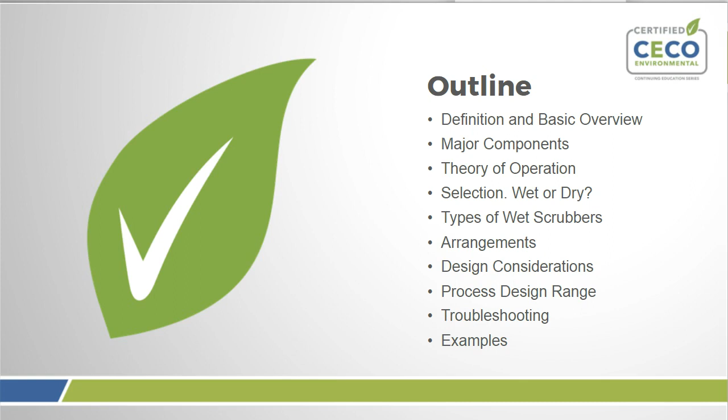But before we get started, we're going to start with a poll question, and you will be able to answer the question on the next slide. So, how much experience do you have with scrubbers? I'm an expert, I have some experience, I have a little experience, what is a scrubber? Here's where you can answer the question. We'll give you a couple seconds.

All right, so we have a good portion in here that have some experience and have a little experience. We got a wide range. I think this will definitely help. The presentation will help most people here. Might be a little bit basic for some of the experts, but I think there's still a lot in there that you're going to be able to pick up on this.

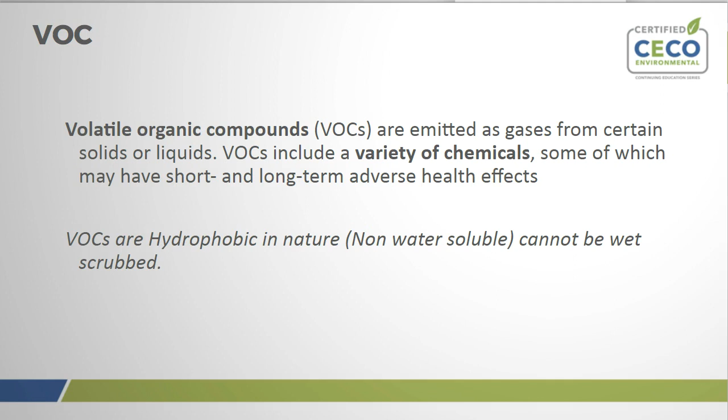Particulate matter. Finally, our last and one of the most frequent culprits in our airstream is particulate matter. We can see the definition above, and in most cases we group this into two categories, 2.5 and 10 microns. While wet scrubbing can handle these emissions, it is not the most efficient in handling these contaminants. If your airstream has particulate matter and acid gases, this might require a system train of air pollution control equipment

That entails separation of particulate matter before wet scrubbing acid gases. If you would like to learn more about particulate matter and how that can be collected via Venturi Cyclone or Dust Collector, please sign on to CECO Certified to look into the cyclone fundamentals.

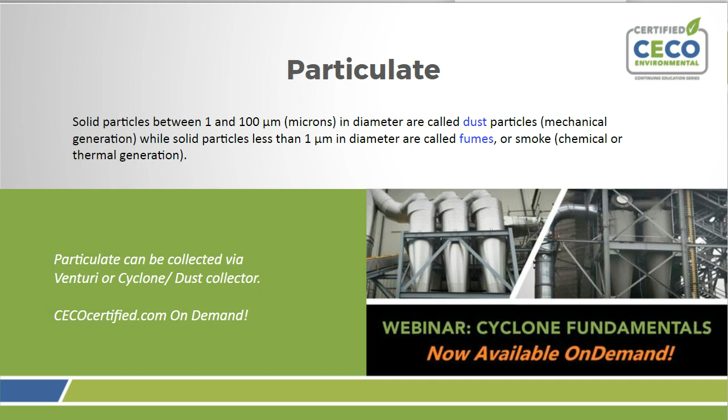Wet scrubber definition. Now that we have an idea of our airstream and our main players, we need to start with some basics, like a definition of a scrubber. A packed bed scrubber, also referred to as a wet packed bed scrubber, is an air pollution control device used to remove and destroy contaminants in an air gas stream.

To simplify, imagine a large vessel or container, like a big propane tank turned on its side, that is empty except for something that resembles baseball wiffle balls inside, held in the center, with a shower head at the top running inside with water, collecting at the bottom like a bathtub, that is cleaning dirty air, which collects dirty water at the bottom of our vessel, just like when we shower.

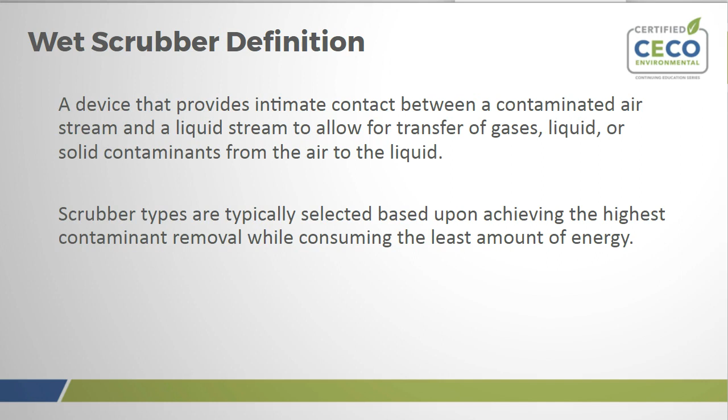Scrubber definitions. We will discuss a little later how a scrubber removes air pollutants, but for now, it's important to know that scrubbers are capable of removing inorganic fumes, vapors, gases, and mists. A scrubber can be used for particulate matter control, but higher PM concentrations can clog the scrubber internals. So a scrubber is limited to airstreams with low dust loadings.

If you have an application for high particulate matter, CECO has another equipment solution for that application. See CECO webinar. Bottom line, scrubbers are not vacuum cleaners.

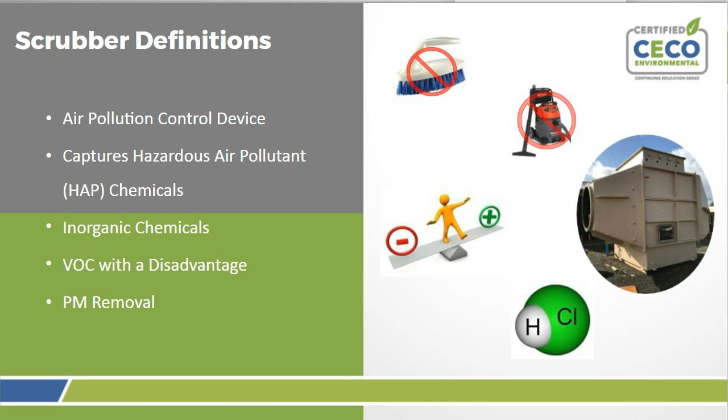Reasons to use a wet scrubber. All the reasons above are true for the use of a wet scrubber, but the main driver is human capital, physical capital, and environmental standards. Number one, the area in which workers are present does not have adequate air quality standards.

Number two, the process is so corrosive or dangerous, the air fumes must be evacuated and removed for the health and safety of the equipment and facility. And lastly, the end user is under state, local, or federal ordinances to require APC equipment or an air permit.

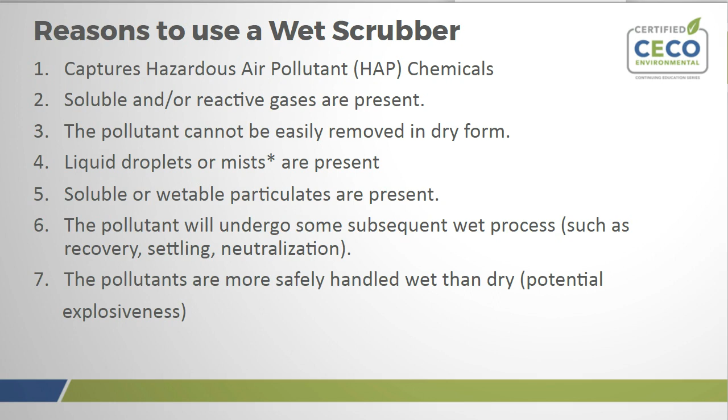Wet scrubbing process. Wet scrubbing is a two-step process. In the first part of this process, we are simply trying to capture the contaminated air. I think a great way to connect this is think about allergies. Anybody suffer from pesky pollen? Nothing helps more than a nice rain, and the proof is in the water.

If you've ever watched runoff water after a rain event, you may see a yellowish hue in the water. That is pollen. All the pollen in the air, we will call dirty air, is then cleaned after a rain event. The contaminant or pollen passes through with the help from mass transfer from air into water.

In the second step, we're trying to then break apart these molecules back into clean air and exit the scrubber with no contaminant or scrubbing liquid. Another good example of how this process is achieved is with the mist eliminator.

Think about an early morning walk near a garden or forest and seeing a spider web covered in small droplets. These small water droplets are grabbed as it passes through. This is similar in the way that a mist eliminator is able to grab the moisture from the air as it leaves the scrubber.

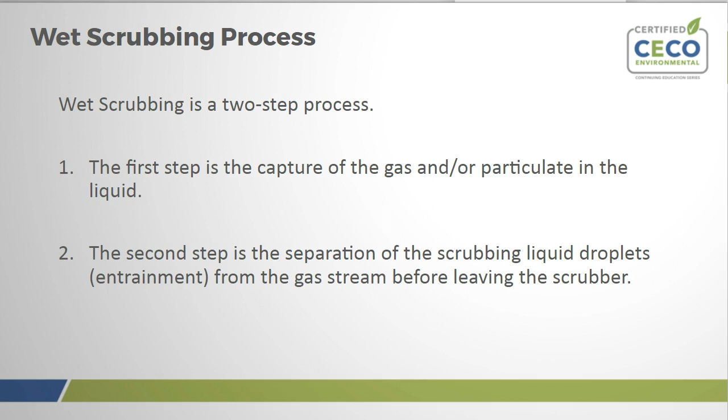Scrubber types. Before we move deeper into the scrubber process, let's take a step back. You may have heard the word scrubber used for other air pollution control equipment such as bioscrubber, Venturi scrubber, spray tower scrubber, or tray tower scrubber. The best way to distinguish between these different types of scrubbers is best to understand each has a niche application usually associated historically with a specific industry or location.

This could be determined in the case of operational costs versus capital costs, or possibly some end users' limits on the amount of fresh water available.

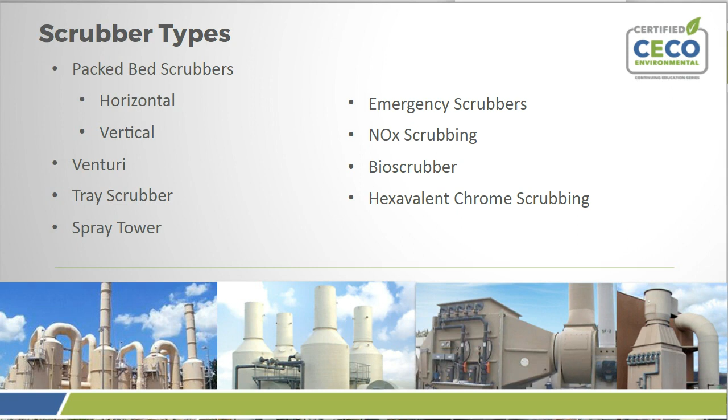Example industries. As for the industries listed above, you can see wet scrubbing has a fit in many processes. Most important when looking into a wet scrubber application, no matter the industry or size of the system desired, is the data. It is pivotal to provide the most current process or stack testing data available.

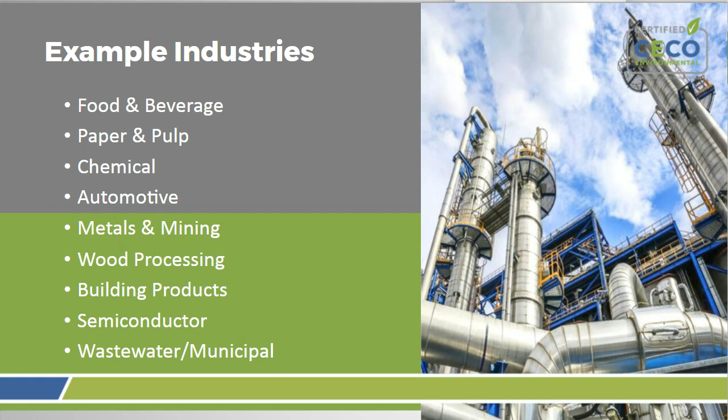Process examples. This data we are looking for is the following: the CFM or airstream volume, concentration of contaminants, and required destruction removal efficiency. This allows us to properly size and engineer a system solution that is the most efficient and fits your needs. The most important thing is understanding what the process is. This will help us determine what type of scrubber system and design will fit best for your application and location-specific parameters.

Such as one of the examples above, in wafer chip manufacturing for semiconductor, we usually see a horizontal packed bed scrubber in fiberglass material construction, most commonly rooftop installation, with some special requirements such as redundancy in pumps and fans, which we would not find in metal plating applications, for instance.

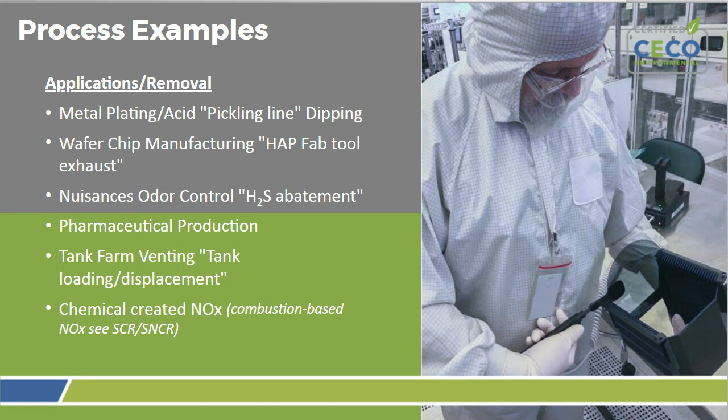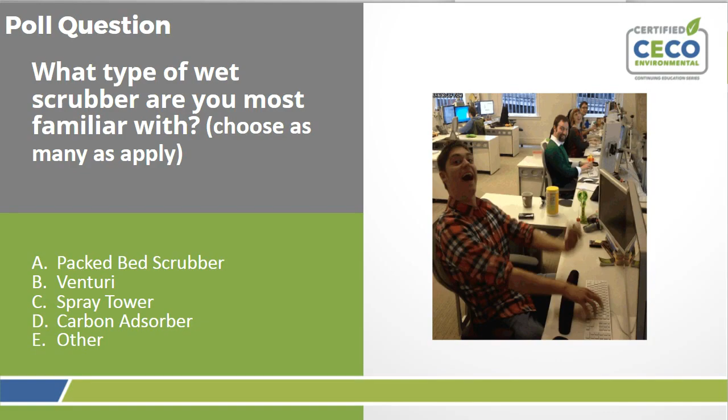All right, everybody, we are at our next poll question. Again, like the last one, you will be able to put your answer on the next slide. So what type of wet scrubber are you most familiar with? For this one, you can actually choose as many as apply. So we have packed bed scrubber, Venturi, spray tower, carbon adsorber, or other. Here's where you can add your information. I'll give you guys a little bit of time on this one since you might have more than one that you're familiar with.

Give you a couple more seconds. We'll take a look at the results and see what everyone out there is familiar with.

Not too surprising that the packed bed scrubber would be the one that people are most familiar with. It definitely is the one that is seen out there quite a bit, along with the Venturi, but it seems like people have experience across the full spectrum of different types of scrubbers that are out there.

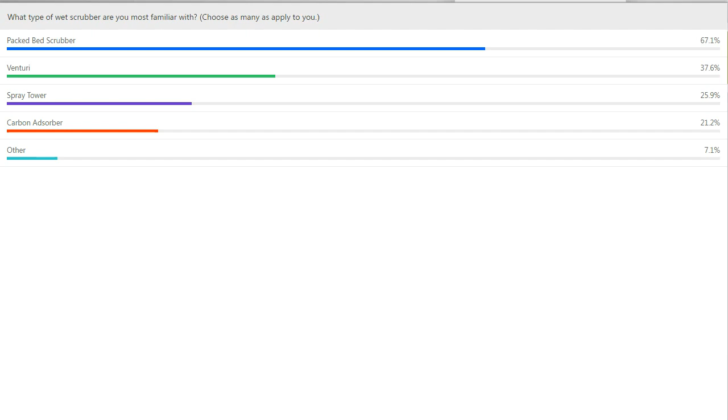All right, we are now going to start getting into the nitty-gritty of the scrubber discussion. Here on the right, you're looking at an exploded view drawing of a typical vertical tower. There are 5 major components that are normally used in a wet scrubber. They are the packing media, the mist eliminator, the recirculation pump, spray nozzle, and the instrumentation and controls.

We'll see in a moment the packing media is the heart of the scrubber. The mist eliminator removes the large droplets. The pump recirculates the scrubbing liquid. The spray nozzles irrigate the packing media with the scrubbing liquid. And the 5th major component, though not shown in the exploded drawing, consists of instrumentation and controls.

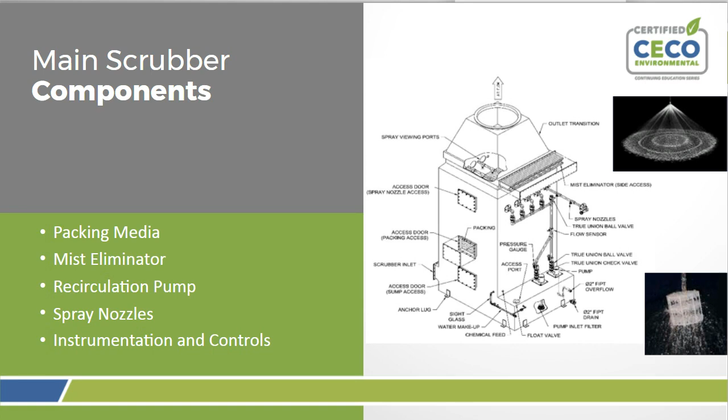There are over 20 different items that we can customize a solution for. The minimum basic ones are flow meter, pressure gauges, valves, pH probe, differential pressure gauges, water makeup, and liquid blowdown systems. So let's move on and see how all these components work together.

And the bottom of the scrubber contains the sump and the scrubbing liquid. A pump sprays this liquid over the packing media, usually through spray nozzles, so it's evenly distributed and flows down the packing media. This can also be done through weir troughs and a few other different methods.

The clean gas is now exhausted into the atmosphere, but before doing so, it passes through a mist eliminator section. The purpose of the mist eliminator is to capture any large droplets that are blown off the packing and also capture the smaller droplets from the spray nozzle that become airborne.

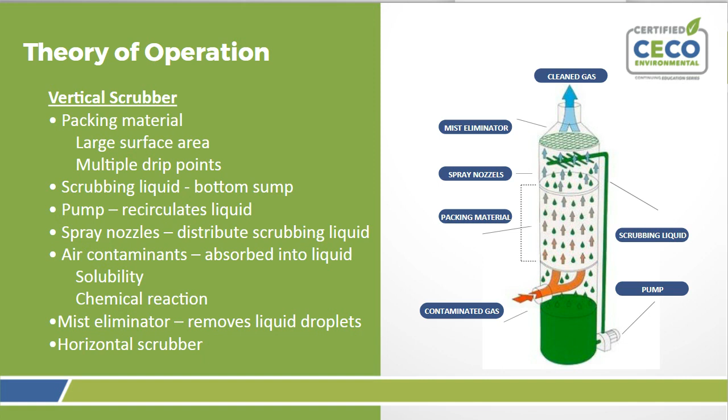Earlier, we talked about three methods of how air contaminants are absorbed and transferred into scrubbing liquid. An example of the first method is when a chemical air contaminant is absorbed into the scrubbing liquid using water only. When scrubbing a strong acid like hydrobromic acid, which is soluble in water, it will ionize, forming a hydronium ion and a bromide ion as shown.

Ionization means that the molecule acquires a negative and positive charge and undergoes a chemical change. Likewise, a strong acid such as hydrochloric acid will ionize in a scrubber using water only, forming a hydronium cation and a chloride anion, and once again undergoes the chemical change. There are many chemicals that are soluble in water that can be removed in an airstream using a once-through water only system.

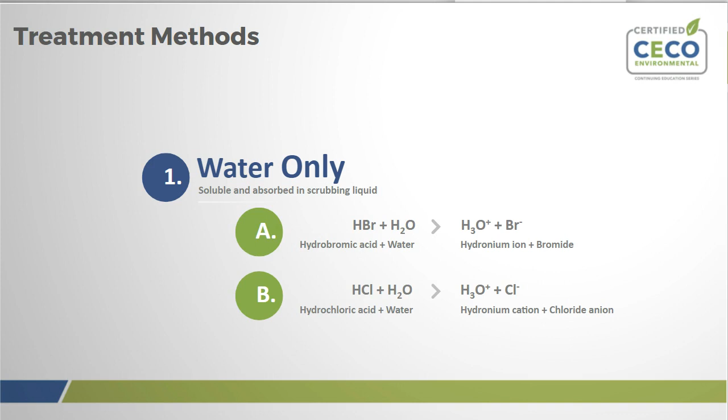The second treatment method that can be used to remove air contaminants requires the addition of a chemical additive. An example is sulfur dioxide, as shown, reacting with water and a solution of sodium hydroxide at a pH of 9 to produce sodium sulfite and water.

Reactions like this, shown in green, are typical acid-base reactions forming a salt and water, which has a neutral pH of 7. This reaction occurs in the packed bed section of the scrubber and is called a neutralization reaction.

An example of this is if you ate too much spicy food for dinner, you can relieve the stomach acid or heartburn by taking an antacid tablet. That'll neutralize the stomach acid. In other words, it's a neutralization to ease your heartburn.

The second chemical reaction and neutralization shown here is a common contaminant, hydrochloric acid, reacting with sodium hydroxide to produce table salt and water. As a side note, you'll notice we briefly talked about using HCl with water only, but here we're showing you can do it as a chemical reaction.

The reason is that in some cases, the addition of sodium hydroxide to the scrubbing liquid actually improves the removal efficiency, leading to a more efficient scrubbing operation. So you need pH control. The pH control is optional for hydrochloric acid, but we do use chemical addition pretty regularly to improve the removal efficiency.

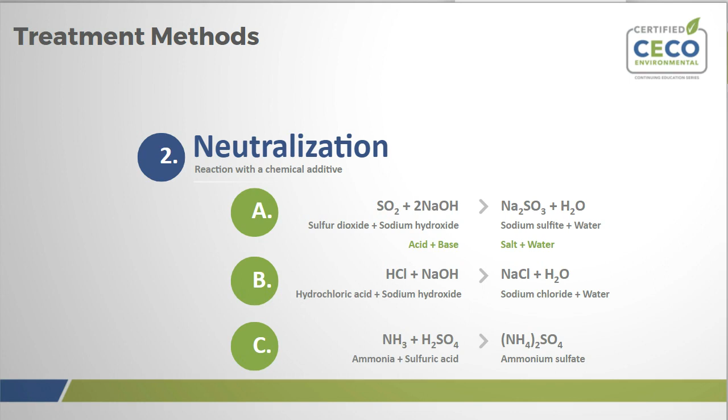I mentioned earlier that there are 3 treatment methods to remove air contaminants in a scrubber. This third method is applicable for a large group of chemicals. The standard chemical engineering gas absorption calculation does not apply to these chemicals because they are not in gas form, but are present as a mist droplet or a fume.

These chemicals are essentially non-volatile. Non-volatile is just a fancy way of saying that these chemicals do not readily evaporate in the gas like the previous chemicals we discussed.

Scrubbers remove these mist droplets or fumes by the mechanical process of impaction rather than absorption. Extensive experience shows that these well-designed scrubbers can remove 99% of mist fume droplets in the 5-micron range or larger.

Now, some of you may be asking, why are you making such a big deal of this third treatment method? Well, in my experience, this third method is probably the least understood and creates some confusion versus the other 2 methods. We'll cover a few major points to help you better understand this method.

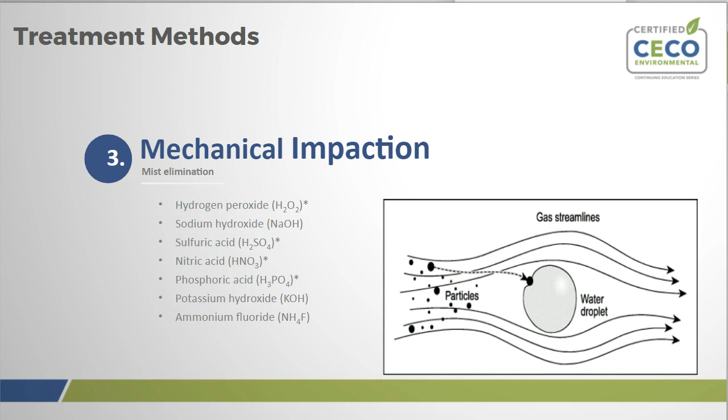There's usually an exception to every rule. First, you'll notice that 4 of these chemicals have an asterisk next to them, and it's possible for these chemicals to vaporize if they are heated enough and are used in a hot process at the source. Any of these chemicals listed are being emitted by a hot enough process to actually vaporize them, typically 200 degrees C or higher.

Then they will condense into micron or sub-micron sized fog droplets when mixed with a cooler airstream on the way to the scrubber. A scrubber cannot remove these fog droplets and will require high efficiency filter beds such as a candle filter or a CECO filter.

It is important to alert and advise any of your scrubber manufacturers if these chemicals are heated at the source, such as a hot plate or even through air temperature, as it may be cooled down to ambient temperatures, and we can put the proper provisions in place.

Second, as already mentioned, we cannot provide a calculation for the removal efficiencies of these chemicals. The removal will depend on the droplet size distribution, which is usually not known and not easy to measure. Therefore, stating a scrubber can remove 99% of mist or fume droplets is only telling half the story. You'll need to add the statement that a scrubber can remove 99% of the mist or fume droplets 5 micron or larger, or 10 micron or larger, or whatever size mist elimination device is required for the process.

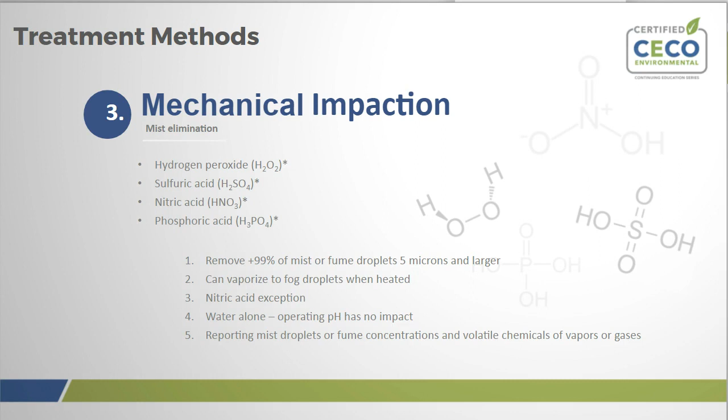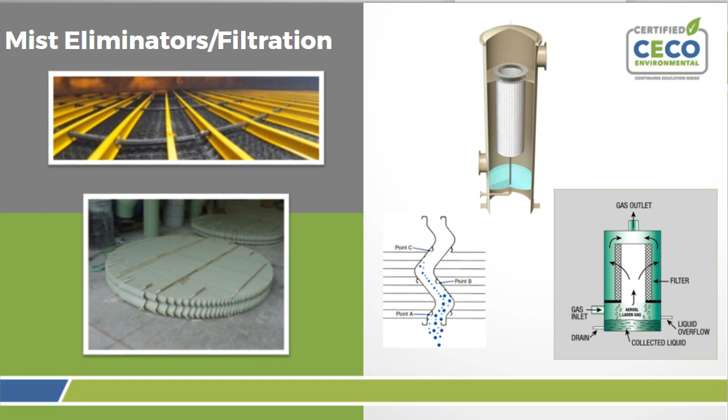All right, so let's get into some configuration. We've covered some heavy technical items. Now let's lighten it up a little bit and briefly talk about scrubber configurations and options.

In a vertical tower, the contaminated air enters the bottom of the scrubber and flows upward through the packing media to the outlet. Spray header lines are located above the packing material that deliver the scrubbing solution down on top of the packing and flows down through and drains back into the scrubber sump. In this configuration, air flows up, liquid flows down in a counter-current fashion. They basically pass each other and mingle within the packed bed, which is why this configuration is called a counter-current scrubber.

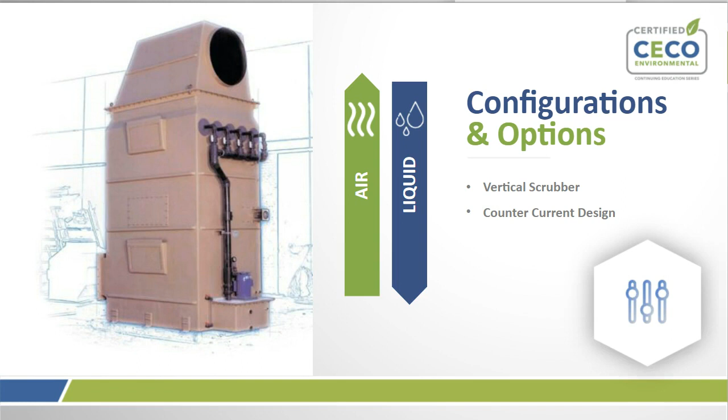The length by width can be adjusted in 1/4 inch or 1/8 inch increments if needed. The design of the irrigation system is simplified since we use a square spray nozzle pattern to cover the rectangular surface area of the packed bed.

A vertical square scrubber needs to withstand a vacuum of approximately 15 inches, so external ribs will need to be added to the fabrication process to give it that additional strength. There's a premium cost for a vertical square scrubber.

This is since custom wood molds need to be designed and built so the fiberglass can adhere to the exterior. This mold is typically not recycled—it's removed after the fiberglass cures and then is disposed of.

The last three items are basically the reason for the increasing cost of a square or rectangular vertical scrubber versus a round scrubber. On the other hand, a round vertical scrubber is a pretty cost-effective solution since it uses a metal mold that can be hand laid up, chop sprayed, or spun around it. Its circular shape is also mechanically stronger compared to a square scrubber of the same size.

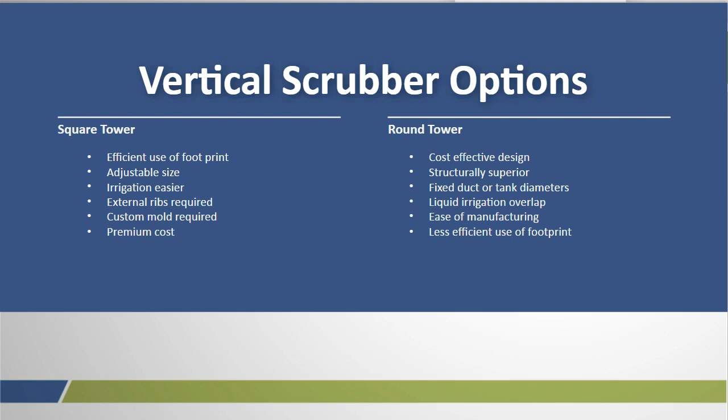Spray headers are located above the packing, delivering the scrubbing solution over the top of the packing, which flows down and drains back into the sump. In this configuration, the air flows horizontally and the scrubbing liquid flows down, crossing each other, which is why this configuration is commonly known as a cross-flow scrubber.

Other than the airflow, both vertical and horizontal scrubbers have the same major components. There are some differences between the two designs, and this may help you decide what suits your specific scrubber needs better.

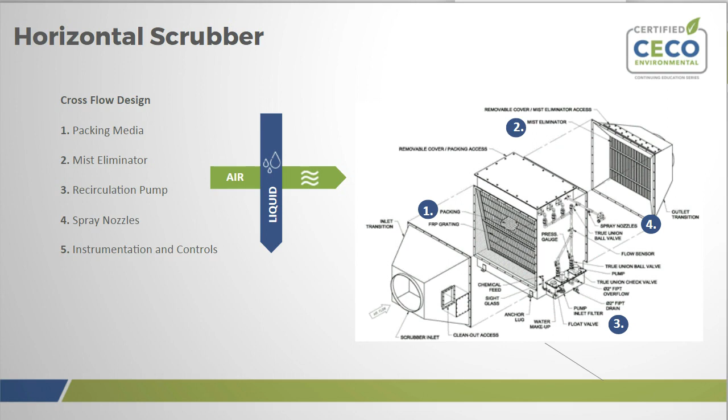A vertical tower makes efficient use of the footprint and uses less floor space. The countercurrent action of the air traveling up through the scrubbing liquid flowing down usually is an efficient design.

Since the air near the top of the scrubber contains the lowest concentration of contaminant, while the recirculating liquid at the top of the pack bed contains the highest concentration of chemical additive, you can think of this as the final polishing section of the pack bed scrubber.

A vertical scrubber is preferred for difficult scrubbing applications because of the long pack bed depth that's required. You can adjust the height of the scrubber from a 3-foot pack bed to a 20-foot pack bed if needed, and you're still using the same footprint of floor space.

There's no chance of untreated air bypassing. There are no baffles required for a vertical tower. Although it requires less floor space, a vertical scrubber is taller in height than the identical horizontal scrubber.

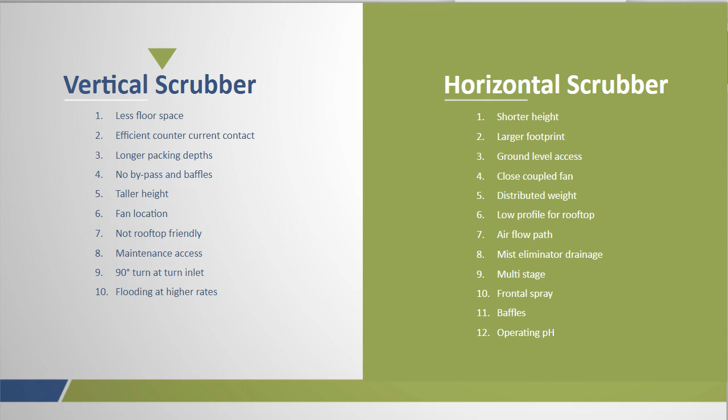All right, let's move on to the horizontal scrubber, or the cross-flow configuration, on the right-hand side. You'll see some clarity on a lot of these items we discussed compared to the vertical configuration.

Horizontal scrubbers are shorter in height, but require a larger footprint. Everything is at ground level, which simplifies the maintenance. You may just need a little shelf or nothing from a platform standpoint, because everything's readily accessible. The fan is typically close coupled and located at the scrubber outlet.

Because of the larger footprint, the scrubber weight is distributed relatively evenly over a large area, not concentrated to one specific section taking the majority of that load. These items make the horizontal, or low profile, design a great candidate for rooftop applications.

The air flows through the scrubber in a straight path without needing to make a sharp turn, like we discussed in the vertical tower. The droplets that reach the mist eliminator in a horizontal scrubber are typically large and drain back down into the scrubber sump. In the vertical scrubber, the droplets are collected from the mist eliminator and drain back down through the packing. So that's a slight difference between the two.

Some air contaminants require multi-stage considerations for different chemical solutions. Horizontal scrubbers are ideal where you can segregate these different chemical arrangements. You may have one section that requires sodium hydroxide, and another section that requires a sodium hypochlorite specific injection. You can actually segment these sections in 3 to 5 foot different pack beds.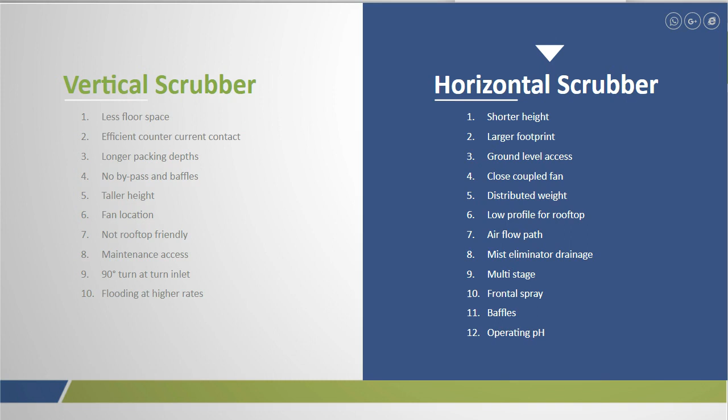So the most common material of construction for a scrubber wall is fiberglass. Polypropylene and PVC are very close to that, and a lot of scrubber manufacturers can provide any of the materials, and there's some on here that aren't even listed.

The graphic to the right shows a fiberglass composition detail of a typical scrubber wall. It's got 4 distinct layers.

The first layer on the interior of the scrubber is called the inner corrosion barrier and provides the primary corrosion barrier, consisting of a resin-rich layer and a synthetic veil. This can be a Nexus veil or a C veil, and it provides the primary corrosion barrier to the system. The second layer is called the interior corrosion layer, consisting of resin and chop strand glass mat. These first 2 layers together make up the primary corrosion barrier.

The third layer is called the structural layer, consisting of resin and glass. The total thickness of this layer is determined by service requirements and the structural requirements of the actual process and the size of the vessel.

The fourth and final layer is a top coat, a pigmented layer, usually colored tan or white or some other various color, and it's got a UV inhibitor for outdoor usage. Basically, the bottom line is most scrubber manufacturers can design around your specific needs.

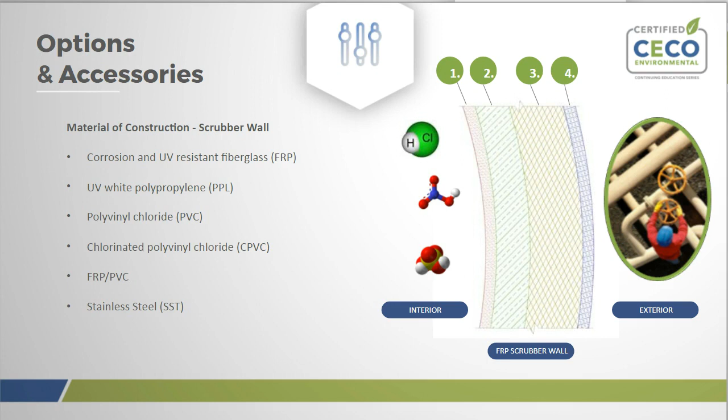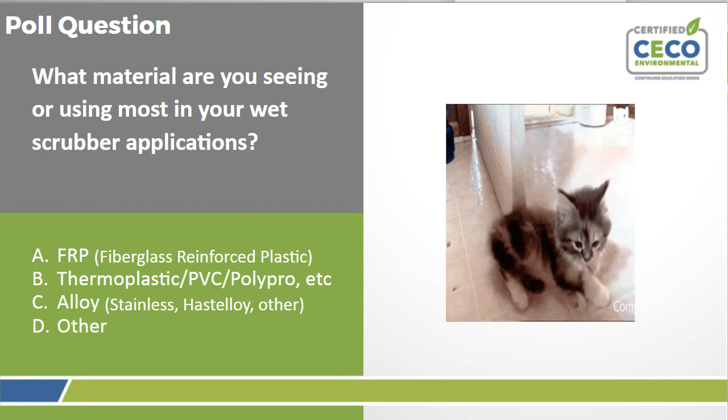But obviously, we just talked about different materials of construction, and we are curious to see what material are you seeing or using most in your wet scrubber applications. You'll be able to put your answer in the next slide. So FRP, like we talked about a little bit more in the slide before, some type of PVC, polypro, an alloy, or something completely different.

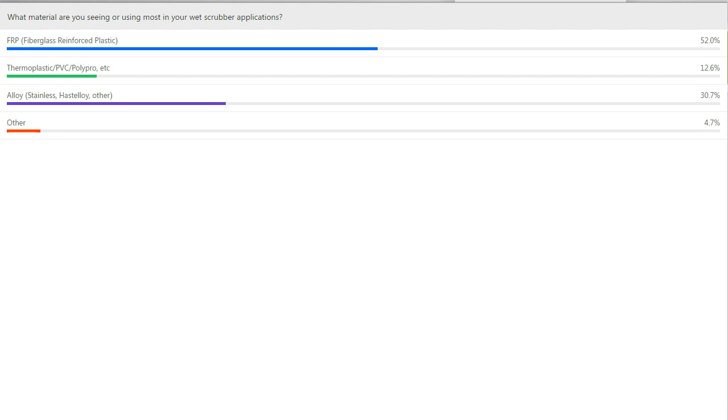Remember earlier when we said that acids react with bases to make salt? Well, when an acid and a base are mixed together in the airstream, they do react to form a salt, which can be a smoke particulate, a very sub-micron fine particulate that'll blow right through the scrubber. Such tiny particles have such low inertia that they won't collide with the packing or get wetted in the airstream. They just don't come in contact with the water, and they just streamline and zigzag right through the packing.

So specifically, when an airstream containing ammonia gas also contains an acid like sulfuric acid, it reacts to form ammonium sulfate and ammonium bisulfate salts. The reaction starts in the duct prior to even reaching the scrubber, and the same holds true for other acids like hydrochloric, hydrofluoric, and nitric acid when a base is in the airstream as well.

The ductwork leading up to the scrubber will eventually contain large deposits of salt, but some of the salt particles will be discharged in the air as a visible emission. So in the case of ammonia reacting with hydrofluoric acid, the particulate will be ammonium fluoride. We realize that sometimes it's impossible to isolate the acid and the ammonia bath, but we recommend designing separate exhaust systems with dedicated scrubbers for both of these systems.

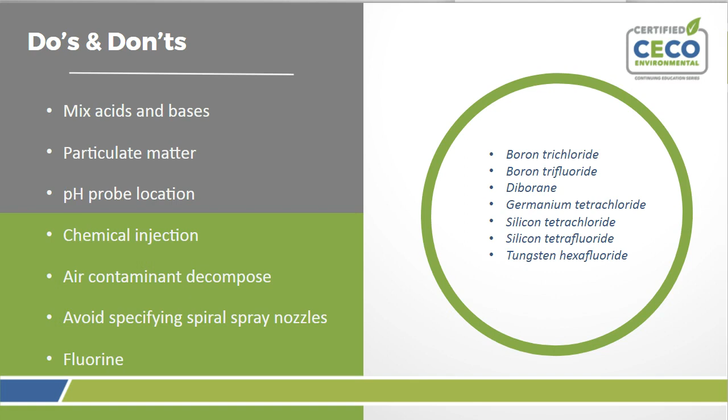So let's talk about removing the destruction removal efficiency. How is that calculated for a volatile inorganic compound such as HCl or chlorine gas? Well, it's a simple formula: Z equals your overall packed bed, N equals the number of transfer units, HTU equals the height of the transfer units, and then we throw in a safety factor. Safety factor can be anywhere from 1.1 to 1.2, and that'll help you determine your packed bed height.

So let's unpack this a little bit. The NTU, the depth of packing needed to provide a certain removal efficiency, is a really long, drawn-out equation, but it can get simplified to the natural log of the concentration in versus the concentration out. So in this example, we've got 100 ppm. We want 99% removal, so it'd be natural log of 100 divided by 1, which would get you 4.6.

So then let's look at the two examples we have here for a minute and look at the height of the transfer units. The HTU depends on three things: the kind of packing being used—there are many different types of packing available in the marketplace right now—the airflow, and the liquid rate. Together, all of these items will give you an HTU number. A large HTU number means a more difficult separation; a smaller HTU means an easier separation. So basically, it's easier to scrub with a lower HTU, and tougher to scrub with a higher number.

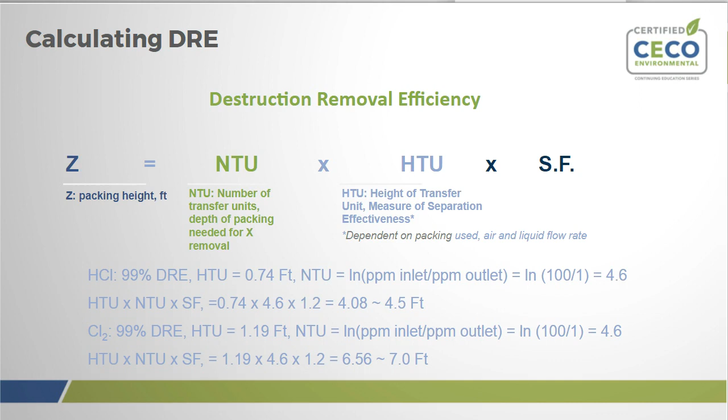So what factors influence or improve the destruction removal efficiency of a volatile inorganic compound? Based on what we just learned, the greater packed bed depth increases the residence time of the air contaminants and improves the removal efficiency. So choosing the right packing, which is the heart of the scrubber, makes all the difference in having a scrubber operate efficiently.

When air pollution control devices like scrubbers were first designed, people were chopping up PVC pipe, they were chopping up glass and putting them in a tower, and that was your very crude tower packing. Nowadays the technology has improved so much, from the 70s all the way to current. They made significant advancements and improvements to allow lower pressure drop, higher operating velocities, improved efficiencies, resistance to fouling, and they're more cost-effective than your traditional Raschig ring that we've seen in some design books.

There's a lot of different options, and your local scrubber company or a packing supplier can really help you determine what's the best one.

So some of the other options we can do: we can slow the airstream down. That'll improve the residence time, which will improve removal efficiency. We can increase the recirculation rate. That has a positive impact on removal efficiency, and we'll get to that example here in a second. In most cases, higher temperature will increase the rate of reaction, which will improve scrubbing efficiency.

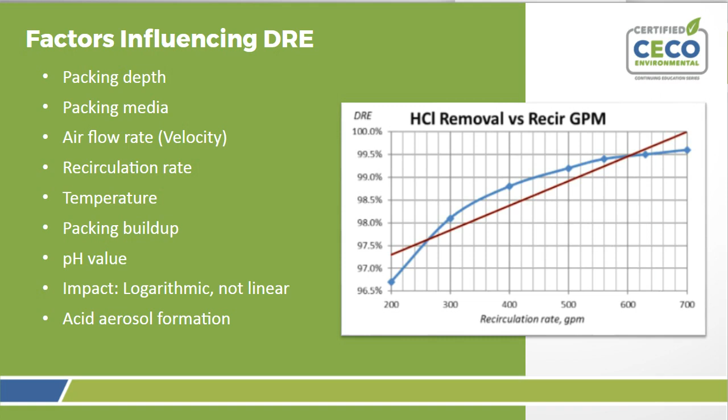So the advantages of wet scrubbing, as a generality, they are often the most economical form of gas particulate separation. They're simple to operate and maintain, with very few to no moving parts. You basically have the recirculation pump as the main moving part. They can be designed for severe service conditions, like high pressure or vacuum, high pressure or temperature erosion, corrosion, and explosiveness. They're very versatile in design, and typically there's no product contamination in the scrubber.

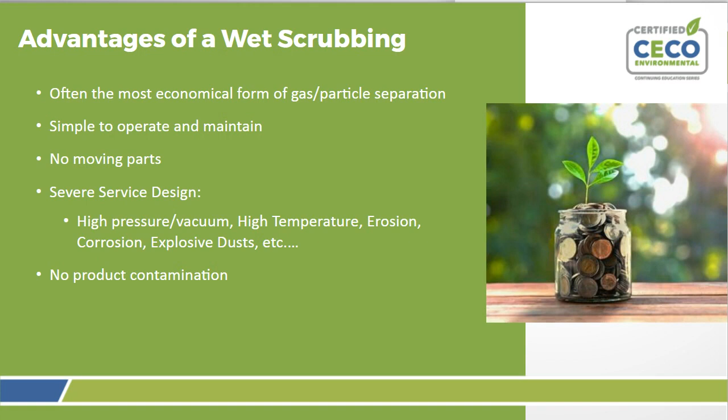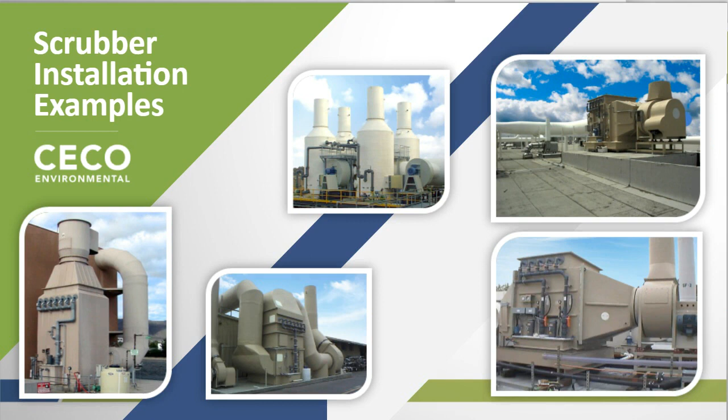Thanks so much, Craig. I'll give you guys some real-world examples of how these scrubbers look at installations and applications. First up, we have an image of a large odor control scrubber for a municipal application. These are round vessels, as Craig discussed, with an integral stack on top and a centrifugal fan at the base. This is a 99% removal of H2S.

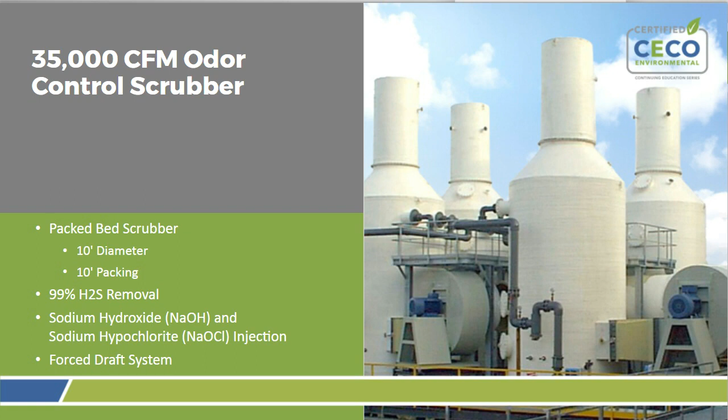Next, we have an outside location. This is for chemical manufacturing, an HCl scrubber, also at about 95% removal. We can see this has an integral fan to the scrubber itself. It is a vertical fiberglass unit as well.

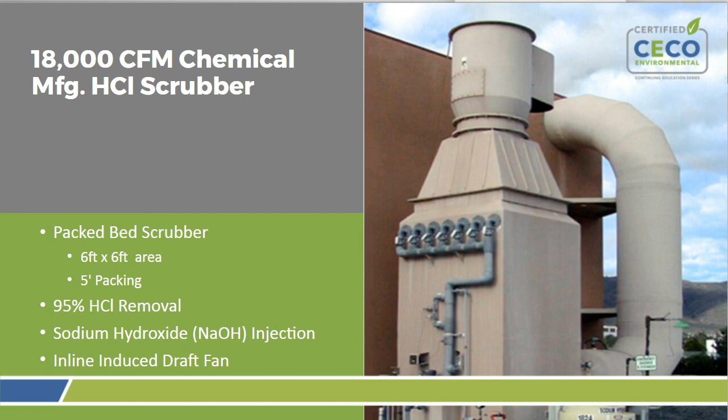Next we can see an aerospace application for metal plating. This is another fiberglass scrubber, vertical, located outside. This unit has a centrifugal fan located at grade, and you can see the ducting right over to it. This is located outside for more floor space inside.

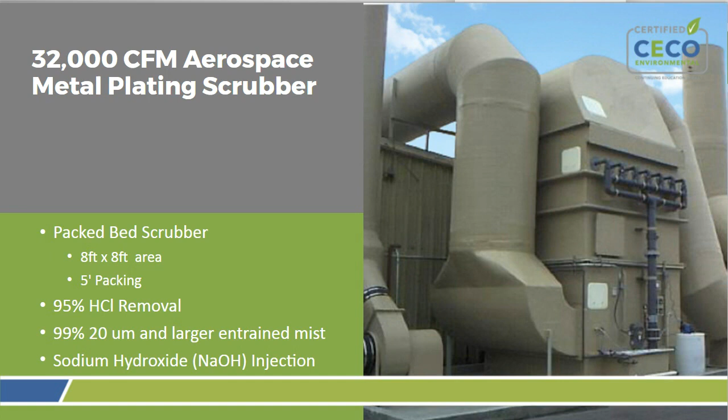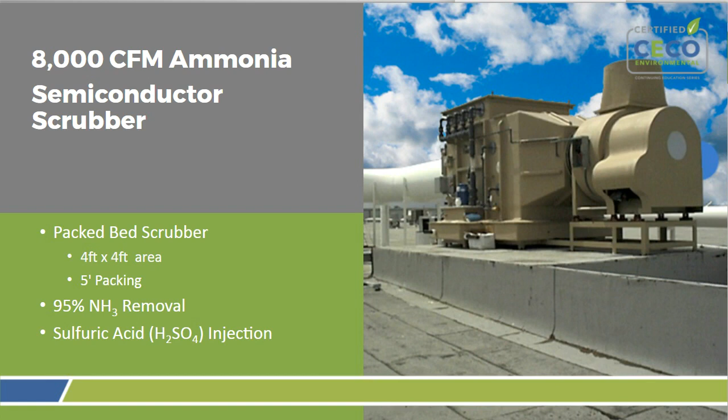Next, we can see a rooftop installation of an 8,000 CFM ammonia scrubber for a semiconductor application. Here's another semiconductor application for a scrubber, and in this image we can see redundant pumps and redundant fans, which is a common call we see on this type of application.

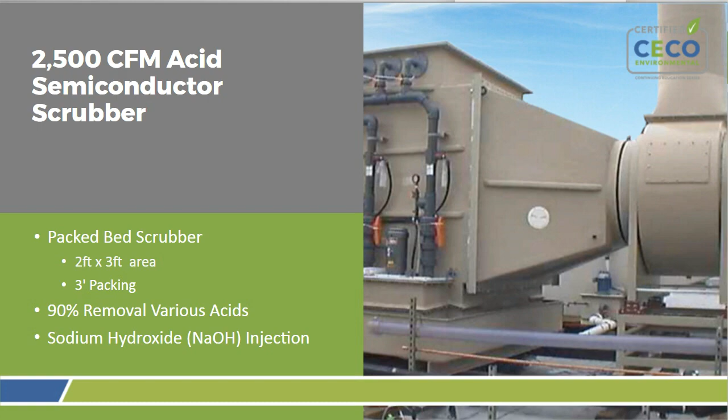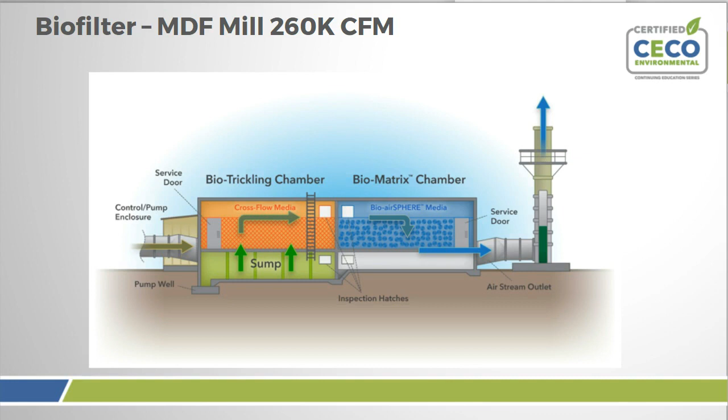Just quickly wanted to touch on one of our applications here, the biofilter. This unit operates off of a biological principle, and we mainly see applications with HAPS and VOC. It operates using bacteria and fungi. You can see an image of this process taking place to the right, and this is actually an image of a biofilter.